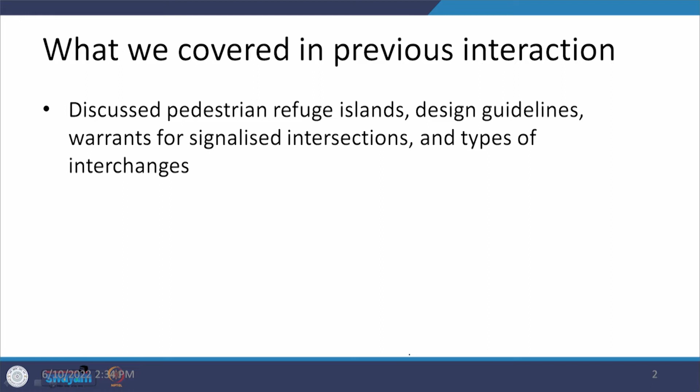Dear students, let us restart our discussion on intersection layouts. In the previous interaction, we have talked about the pedestrian refuge islands, and then we took the various design guidelines, which was followed by the warrants for signalized intersections, and then we had a look on the types of interchanges.

In today's interaction, we are going to move forward, and we will be first talking about the warrants for interchanges, and then what can be the feasible combinations under which we have to provide an interchange when we have different type of roads. And then related to the interchanges and specifically the ramps, we are going to talk about the various geometric features, and finally we will be discussing the ramp terminals.

So, let us start with the warrants which are required and under what conditions the interchanges should be provided. Now, these are related with the same conditions as we have discussed before. That means, they are related with the traffic volume, the type of mobility which needs to be ensured, or it may be an outcome of the topographic features. So, the very first point is that if the total traffic on all arms is in excess of 10,000 PCUs per hour, then this is one case where the interchanges are warranted.

Another condition is that if we have to maintain a total access control, that means there are limited locations from where the entry and exit can be provided to a system, then that is also a case where the interchanges need to be considered. Another case relates to what has been taught in terms of the types of interchanges, where we said service interchanges and system interchanges.

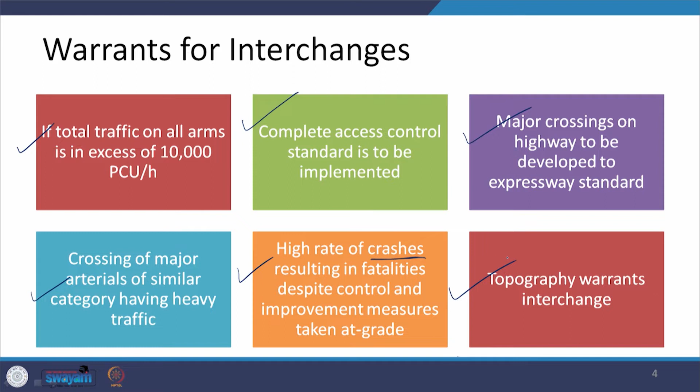Another case can be related to the crashes. If many improvements have been done at grade intersections so as to eliminate or reduce the number of crashes happening at that location, and that is not resulting fruitfully, then probably the next solution is an interchange. And as I said, the topography is another thing which may also warrant that we have to provide an interchange.

Now, if we try to talk about the feasible conditions, then here what you can see is that we are talking about urban roads. So, we have collector streets, subarterials, arterials and urban expressways, and this matrix tells that when you have a collector crossing with the expressway, then it is recommended on the basis of the site conditions, but in the rest of the cases usually it is not going to be there.

When we talk about the subarterial, if it is coming with an arterial, then it is on the basis of site conditions, but if it is coming with the expressway, then it is generally recommended. If you talk about the arterial and its crossings with the other types of road systems, then it is shifting by one towards the left: if it is a crossing with a subarterial, it is on the basis of site conditions, but in the other two cases we are going to usually recommend or provide an interchange at that particular crossing.

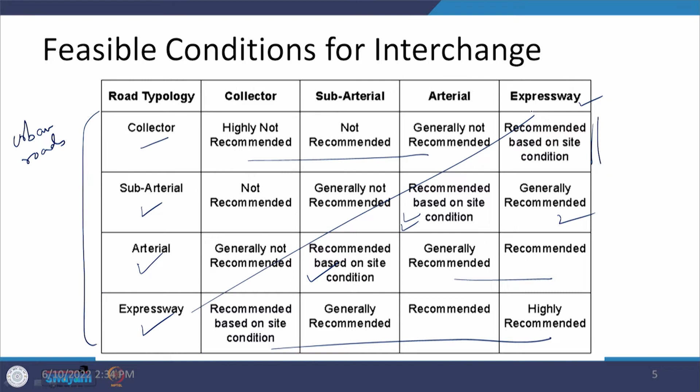Now, with expressways, if we have to look at the conditions with respect to the mobility on the expressways, then we are probably going to provide one. So, what you found is that if I put it in this form as a matrix, then all of the things are getting repeated, and that is how we can create it.

But if we look at the rural highways, where we have different categorizations like intercity expressways, national highways, state highways or the district roads, here also the same condition is observed. When you are talking about ODR or MDR with an expressway, then it is usually recommended based on the site conditions, and when we say site conditions, we are looking at the amount of traffic which needs to be separated out so as to ensure the mobility on the expressway.

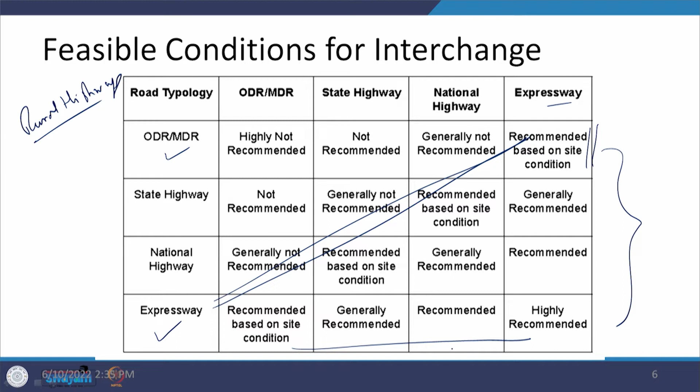And the same way, if we try to see, then we can again create a line here, and when we create this line, then this matrix is going to be repeated. In that sense, if we look at an expressway, we have to provide the connectivities with the rest of the things, then this is going to be provided, and of course, when an expressway crosses an expressway, then it becomes a highly recommended situation. But when we are trying to provide different types of interchanges which we have looked at, we have talked about 3 arm interchanges, 4 arm interchanges, or service or system interchanges.

Different categories were discussed, and if you look at those categories, then here in this slide we are talking about the amount of space which is required, and you can see that the minimum space is required in the case of diamond, where it is 28,000 square meters. But if you are going to a rotary which is having 2 levels or say 1 level system, then it is going to be enormous. It is 1,80,000 square meters area which is to be acquired beforehand. And in the case of full cloverleaf also, it is not a small amount, it is quite a big one, as 73,000 square meters are required.

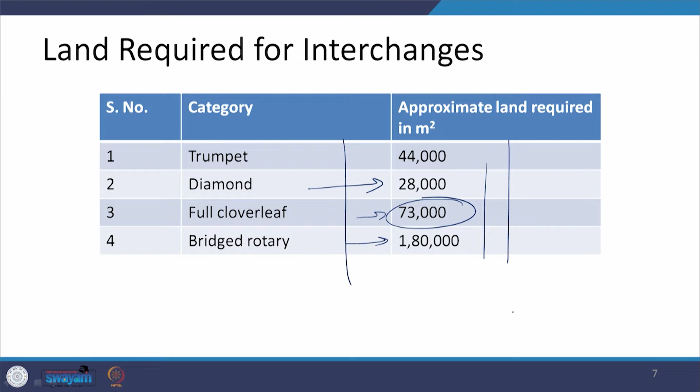Now, let us talk about the geometric features. When we talk about geometric features, the very first thing which needs to be looked at is the design speed. And this design speed is to be talked under different scenarios, like when we are talking about the highways, we have already discussed in the very starting of this course, it is considered as 80 kilometers per hour or 100 kilometers per hour, but on urban expressways, 80 kilometers per hour is the value.

If you are talking about the ramps on the multi-lane highways, then it should not be less than 40 kilometers per hour. And wherever the 2 connectivities are there on which the speed difference is going to be observed, say you are moving on a highway and now you are exiting the highway, so you have to reduce the speed and then get out of the system. So, in those cases the speed differential becomes an important thing, and this speed differential at any point of time should not be more than 10 kilometers per hour. So, it is a sequential manner. You are coming from 100 to 90, 80, 70 and so on. That is how it keeps going on.

Now, when you are talking about interchanges at different levels, we have discussed that there are loops, semi-direct connectivities, direct connectivities, diagonal connectivities, and therefore, an essential element is the ramp. Now, when we are providing these ramps, what needs to be taken care of is what we are going to talk now. The very first thing is that it should have 2 lanes as far as possible instead of a single lane system, because tomorrow you cannot reconstruct. If the traffic increases and the requirement is there, then it will become very difficult to have one more lane. So, from the very starting we talk about a 2 lane system.

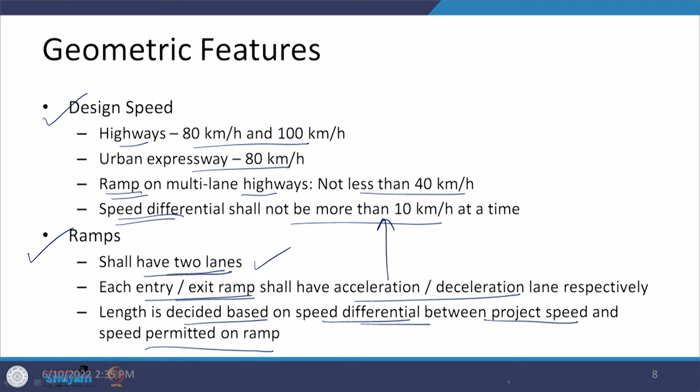Entry and exit ramps shall have acceleration and deceleration lanes respectively. This is an additional feature, because this helps in negotiating the speed differential with increments or decrements of 10 kilometers per hour. Length is decided based on the speed differential between the project speed and the speed permitted on the ramp. So, if we are talking about 40 kilometers per hour on a ramp and we are coming at 80 or 100 kilometers per hour, this difference has to be taken care of. And when you are accelerating and decelerating, on the basis of the acceptable or comfortable acceleration or deceleration rates, we can get those lengths. So, there are certain values which are already given, and few of these we have looked at previously also.

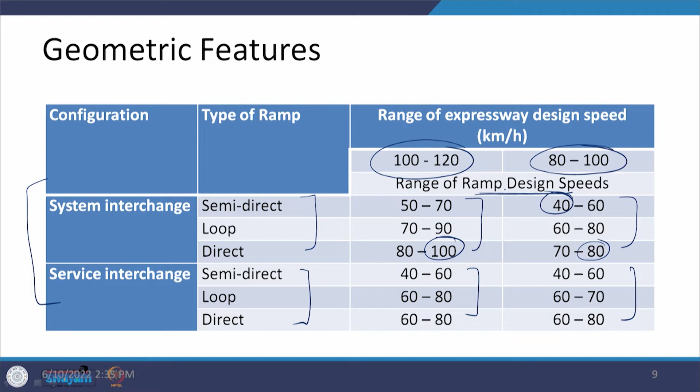The highest value we are looking at is the lowest of the speed range on the expressway. Similarly, on the other side, we have 80 as a value, which is again the lowest of the speed range of the expressway. These are the values which can be considered. These are the different types of speeds, and as discussed, it should not be less than 40 kilometers per hour. This is also being talked about here.

Now, in this slide, further information has been incorporated, not only about ramp design speed, but also two features: radius of curvature and safe stopping sight distance in meters. These are given for design values on major highways, which can be 80 or 100 kilometers per hour, and for those speeds, the minimum or desirable values of these three components are given, but we have already discussed these.

So let us see what the radius of curvature or SSD values being talked about here are. They talk about 60 or 45 meters as a minimum, but desirably 90 or 60 meters as a radius or SSD respectively, at a ramp speed of 50. For 50, SSD is 60. The same is done here for a ramp design speed of 65, where SSD comes out to be 90, and the radius of curvature is defined as 155. But for ramps, the values given here are 45 meters of SSD and 60 meters of radius of curvature.

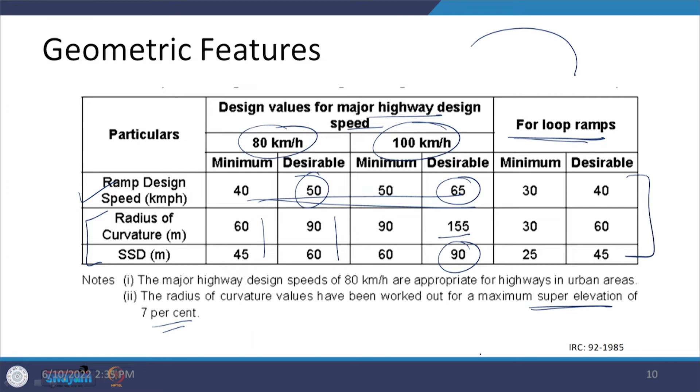So when designing this, when the loop is taking a curve in this form, another thing to look at is the super elevation, and the maximum value of super elevation, as discussed previously when we talked about alignment, is 7% here.

Now, when we look at this ramp structure going continuously with changes in elevation, the sight distance is one thing we are trying to look at. For that sight distance, the driver's eye height has been kept at 1.1 meters. For the object, the object height is kept at 0. So whatever line of sight is there is being observed and ensured.

When we ensure this, it results in some value, x meters. This x meters, when looking at the profile, needs to be adjusted such that the distance traveled corresponds to the distance traveled in 10 seconds. That is the minimum value which needs to be ensured.

So this is how we find out from where to what point we are going to measure, but at the same time, this point being talked about here, in plan, can be defined as the nose of the island. From that nose of the island, we again take a distance x meters, and if our vehicle is there at that x meters, this is how it is going to be ensured.

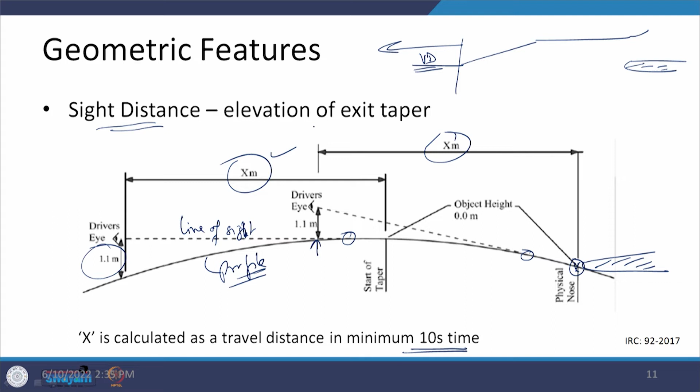These are the ways in which we are going to start, and another thing to consider is that because you have a design in this form, there can be a nose of the island. So looking at this, another thing is that the start of the taper is there, and from that start of the taper, the visibility distance should also be available, and that visibility distance is taught as x for a 10-second movement.

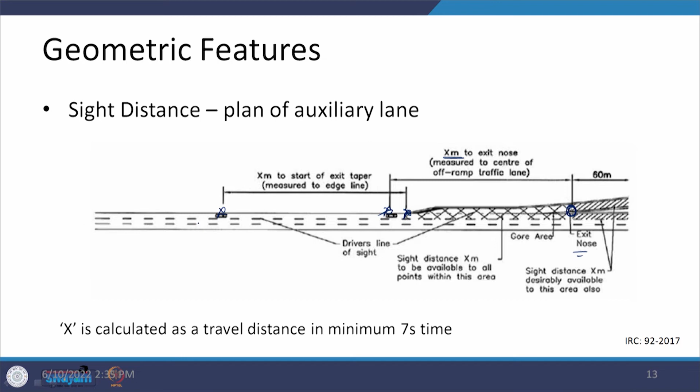But when we are looking at these auxiliary lanes, the time which we consider to calculate x is 7 seconds instead of 10 seconds.

Now here you can see this is an exit nose. This is the point and this one is the island, and here we have the chevron markings. These chevron markings culminate at this point and then extend as a straight line, as we discussed when we talked about pavement markings.

Now what we are doing is from the nose we again take x meters, so you come to x meters at this point. Then there is another location where we observe that tapering is going to happen, required on the basis of the deceleration lane length to be provided under this condition.

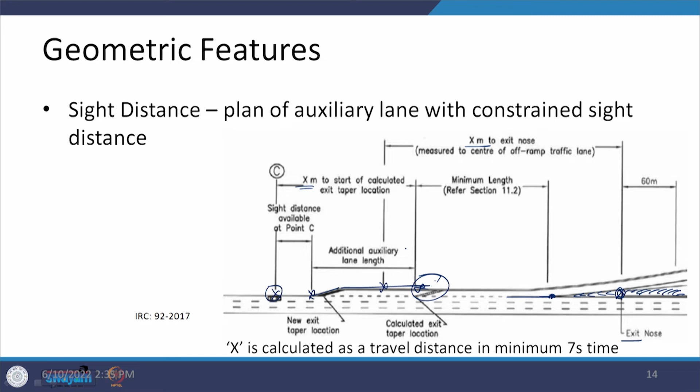Now if there are constrained side distances, how we can readjust is that from this particular point we go back again x meters. So we come to this point, and from there we look at the sight distance which is available. We come to this point and from there the taper has been provided. This additional auxiliary lane length may be required, and again the distance is calculated on the basis of 7 seconds time.

Now the next thing is that because this ramp is going from an elevated system to a ground level, there can be an at-grade intersection with another road, so the gradient also needs to be looked at.

There are different values being talked about here. Tangent grades when you are coming towards the ground side are preferably flat, limited to 4%, but not exceeding 6%. But when you are on ramps, they are desirably 6%, not more than 7%, and on high speed facilities, flyovers, or access controlled facilities, these are 2.5% to 3.5%.

Now when you are coming from the top and reaching the bottom, the system is going to be in this form - you have a summit curve and a valley curve. There is a valley curve at the lower end and a summit curve at the upper end, and that needs to be designed, so the length of this curve also needs to be taken care of.

Then another thing is the medians, if provided, or the shoulders, if provided - what should be their width. The medians should have a minimum width of 1.2 meters, and shoulders, if we are talking, should be provided as 2 meters wide, but out of this 2 meters, 1 meter can be a paved situation.

Then the number of lanes - we have already said that at minimum 2 lanes we should try to provide, but there may be a requirement of increasing the number of lanes, and that depends on the total amount of traffic volume moving on these ramps, and at the same time the capacity of one lane on a ramp. Based on that, the total number is identified.

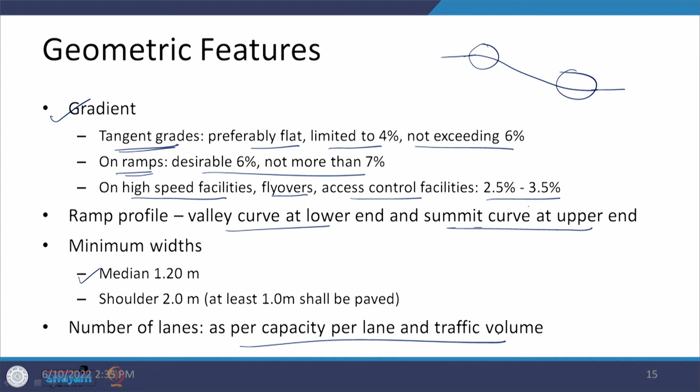Now we are looking at a condition where what superelevation value is there, what should be the radius, and they have been defined for different values of speed. The values here are as low as 2% superelevation, which in this case is as good as camber. But when you go above, this is 4 or 6%. 4% is the usual value adopted for urban areas, and then we try to go to even 6 or 7%. Desirably it is 6%, but maximum if required we can go to 7%.

We can also calculate these values directly by using the formula which we have discussed previously.

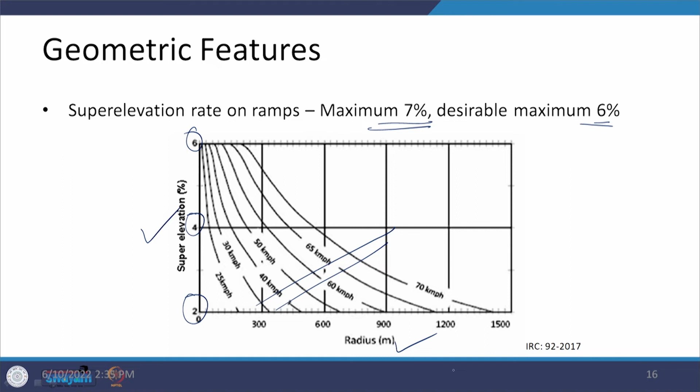If we are required to provide acceleration and deceleration lanes, because there is a changeover in speed from highway to ramp or ramp to highway, then these lanes may have a length of 250 meters as desirable and 180 meters as minimum for the acceleration lane, and 120 meters or 90 meters respectively for the deceleration lane. Another point is what can be the lateral clearances which need to be ensured.

If there is a road going at the top and then there is an underpass, the road is also going in this form. We need to see what should be this value as a lateral clearance as well as vertical clearance. When we talk about lateral clearance, whatever carriageway is being provided along with the shoulder on the sides is what we are going to talk about. So the roadway with a normal shoulder is what we should try to ensure.

In the case of overpass, meaning this particular road which is going here, what should be the lateral clearance with respect to the carriageway is what we are talking about. We may have a curved section, and if that curved section is there, it can be 225 mm wide, with open parapet walls provided on the side so that no vehicle gets out of the system and falls down.

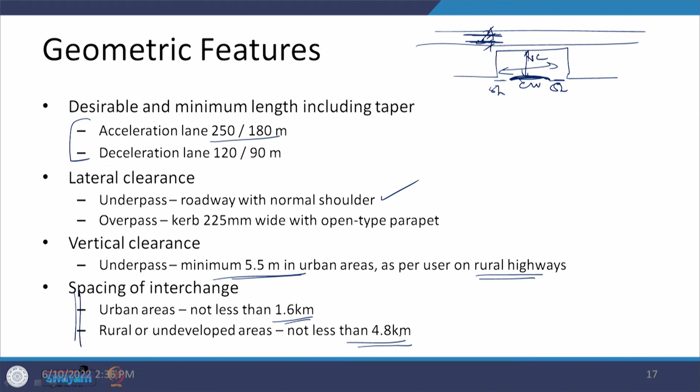One other feature is that as we talk about interchanges, we again and again say that there is limited access to it, in the sense of entries and exits—entry to the system and exit from the system.

When we are looking at this, the various things usually considered are the functional classification of the road. Obviously, when we say arterials or expressways, this access control is going to be quite high. Or what are the characteristics of the traffic, how much traffic is there, what is the composition, and what are the cutting traffics which are there on the crossing roads. We have to take care of that.

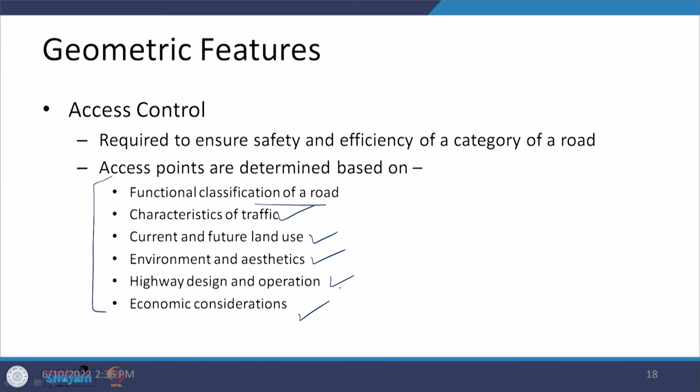Along with that, we have to see how much traffic gets in and gets out of the system, so what are their proportions. Then current and future land uses are also going to make a difference in terms of the traffic which is going to be either attracted or generated at that location—environmental factors or aesthetics of the design, highway design and operation, and economic considerations. So there are so many attributes or variables which need to be taken care of when discussing these.

Now, what are the typical challenges which need to be taken care of when providing these interchanges? The very first thing is that sight distance needs to be ensured. Wherever the exit is there, as we have already looked at, sight distance has to be taken care of from the nose of the island. And when we talk about the nose of the island, there is going to be a chevron in this form and then a straight line which can be 30 to 60 meters long.

When we are looking at this, we are talking about the gore nose to the paved gore. So this is the gore nose area, but when you are looking at a condition where here the system is going to be in this form.

So, this is another area which is a paved gore, because the funnel is getting created here. So, this total distance should be unobstructed, and this again we have discussed in terms of x values and others. Then exit speed change, because when you are coming out of a system in this form and then going, there is an exit speed change from say 100 kilometers per hour to 50 kilometers per hour. So, what is this? We have to use the deceleration lane here, so we have to take care of that.

The merges: by merges we mean the movement here, and this is the system. The vehicle is coming from here, it goes along, then takes this deviation and comes into the main traffic. So, when we are providing these acceleration lanes, rear end crashes can be reduced a lot. Then right side entrances and exits should be avoided, because they are opposite to what the driver is otherwise assuming.

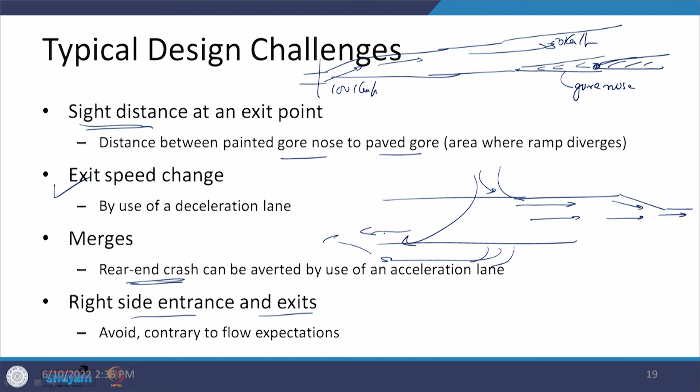Then fixed object hazards. Fixed object hazards may come because there are requirements of illumination, of providing road signs, or if there is metering on the ramps, then the signals are going to be there, or there are rails provided on the sides of the carriageway at its extremities. So, whatever such things are there, they should not create any obstruction; we have to take care of that.

Wrong way entrances. Wrong way entrances happen because there is a flaw in the design. When that flaw is there, the vehicle which is not expected to come from a particular direction is now coming and creating a confusing state for the other drivers or vehicles. So, that needs to be taken care of. This also happens when you are coming into a system in this form and at the same time going out of it. If the highway is provided, traffic goes here and traffic comes here. So, what is the area provided between these types of connectivities, which happens more in the case of cloverleaf arrangements.

So, what is the spacing between the entrances and exits? These spacings need to be looked at with respect to the weaving portion, and what should be the length of the weaving portion. We will be talking about this also. Or the staggering of the ramp terminals and controlling the access to the ramp is another way that we can control things to make it safer.

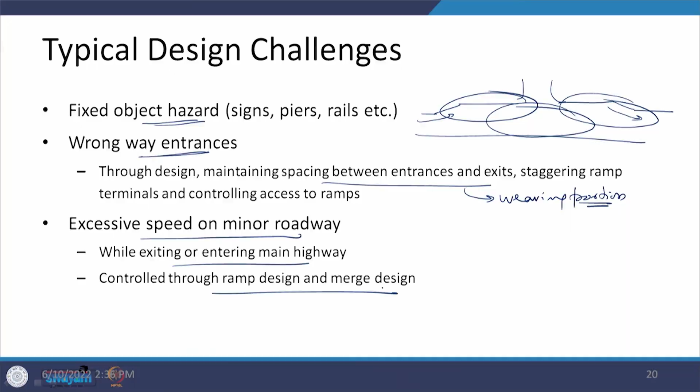Excessive speed on the minor roadway. That may happen, and if they are exiting or entering the main highway with high speed, they may not be able to be controlled in this area, and this may be fatal to the vehicle, or to other road users too. So, this needs a good ramp design or merge design, and that is where the length of acceleration lane, deceleration lane, and the sight distances to be ensured with respect to the nose of the islands, which we have discussed, have to be taken care of.

Now, let us talk about the ramp terminals. What are ramp terminals? These are the portions adjacent to the through travelled way, which include a speed change lane, tapers and islands. So, vehicles are coming out of the system, maybe negotiating in this form, or negotiating directly outwards, say in terms of a diagonal ramp. That particular element is what we are now looking at. As far as possible, they should be designed as a free flow type, and there is not going to be a reverse flow on these, because all of the traffic is moving in the same direction.

Now, these can be of two types, one is an entrance terminal, another one is an exit terminal. Now, when we talk about the entrance terminal, it means the traffic is coming from a minor road and it is coming on a major highway, and therefore, this ramp traffic is getting merged on a high speed road. But exit terminal means a condition where the vehicle is going out from a highway on which it was moving at a higher speed, and now coming on the ramp where the speeds are going to be lower. So, these are the two things.

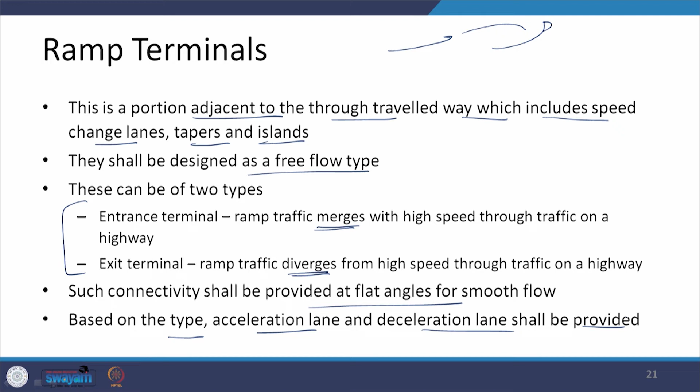So, in one case there is going to be a merging action, in another case there is going to be a diverging action, and we have looked at the design of the acceleration lane and deceleration lane, which are basically related with these situations. Now, where the merging and diverging are happening, they should be at flat angles as far as possible, and this will ensure the smooth flow. Then based on the type, acceleration lanes and deceleration lanes need to be provided.

The speed change lanes shall be visible to the approaching traffic moving on the horizontal curve or the vertical curve. When we exclusively talk about the entrance terminal, they shall have sufficient length so that the vehicles can take a turn on the ramp at the design speed for the ramp we have seen in the tables, and then they can increase the speed to the operating speed on the highway, because they are coming with a speed of say 50 kilometers per hour, but on a highway the speed is either 80 or 100 kilometers per hour. So, it is progressively increasing.

There shall be sufficient maneuverable space, so that the entering driver has a view of the traffic in the adjacent lane and can move laterally to the main lane of the highway as soon as the opening appears. So, it should have sufficient distance in this form. The traffic is moving here, and there is traffic which has come in this form and then gets into the situation like this. So, sufficient space needs to be ensured. No curve shall be provided within the length of the acceleration lane.

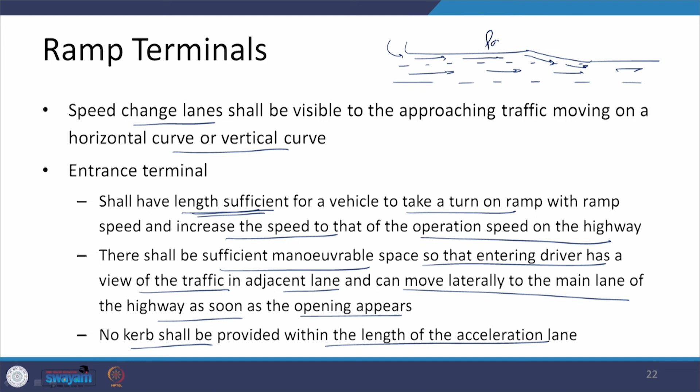Then these can be of two types, the direct and the parallel type. The one we have discussed here is a parallel type, and the other can be that you are coming from here and getting into the system in this form. The traffic is going this way, and the traffic comes and tries to merge in this. So, this is a direct case. This direct taper provides a direct entry at flat angles, and it is usually preferred by drivers, though in the parallel situation they have more space and better visibility of the traffic moving in the adjacent lane, and it requires more space if there is a turning curve at that location.

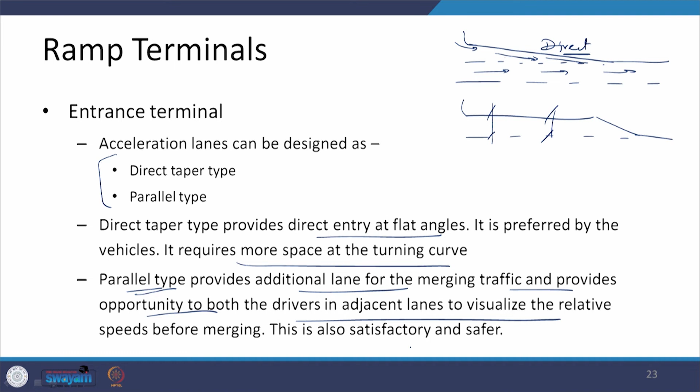When we talk about the parallel type, it creates an additional lane, as we have already looked at. So, this is going to be an additional lane in this case, and it provides an opportunity to both the drivers in the adjacent lanes to see each other, judge each other's speeds and accordingly do those maneuvers, and it is satisfactory and safer in that.

When we look at the exit terminal, the length of the exit terminal again has to be long enough to allow the vehicles to reduce the speed from highway speed to ramp speed, and if they are taking a curve, they should be able to negotiate those turning curves too. The radii are already discussed with respect to the design speeds on ramps, and here also we can have both types of designs: the direct taper and the parallel taper. The nose separating the through lane from the turning lane shall be offset from the edge of the through lane by 2 meters. So, this is a nose which is provided, there is a through lane here, and there is the other lane in which the traffic is going in this direction.

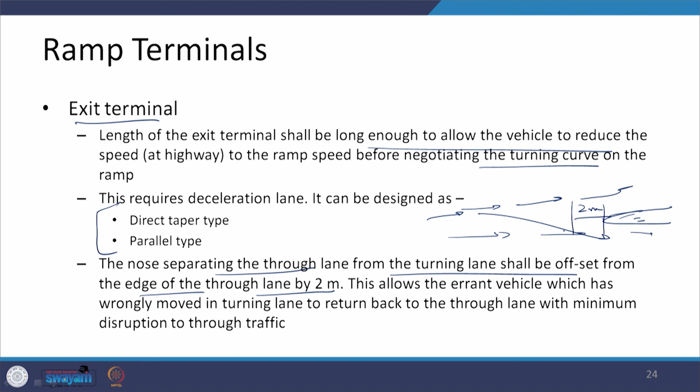Now, this is going to be offset by 2 meters backwards. The reason being, if by any chance any vehicle has gone into this deceleration lane and wants to come back, then that should get an opportunity to do that. The core area which is formed by the edges of the through lane and the turning lane immediately after the point of divergence shall be kept clear of all obstructions, so that they allow recovery to the vehicle which is getting out of control.

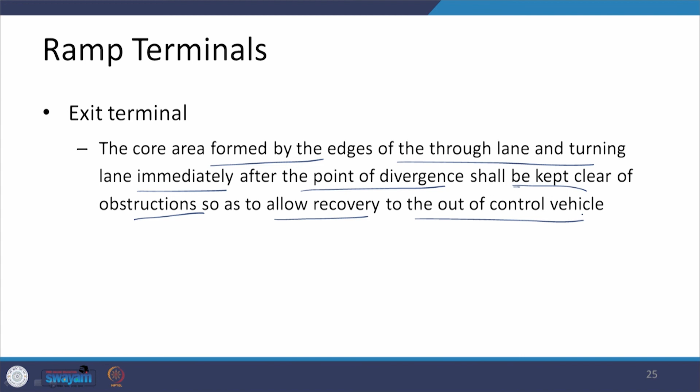So, this point we have already taken care of when we discussed the deceleration lane and the sight distances being ensured in that. So, here what you can see is that this is a case where the traffic is coming from this direction and it is accelerating here. So, this is parallel type for accelerating condition. The through traffic is coming from this side. So, this is a parallel type of system where this distance remains constant up to a certain length and then it becomes taper.

So, there are different widths which are going to be there. The location marked at A is creating a funnel condition wherein the width has been reduced from W2 to W1, and this W1 is the width of a lane at this point, which is 3.5 meters wide. Then in the taper design, one difference is in terms of these elements. The nose which is getting into the area is increasing in length. So, your point B is increasing in that direction.

So, here you are trying to exit, but basically at this point it is happening. So, that is where our W1 is going to be at this location, and the taper which is used is 1 in 25 to 1 in 30, whereas this is a deceleration situation, the traffic is coming from here, is deviating to this direction and then finally going out of the system. Because this is a parallel type, this is 3.5 meters. So, this W1 changes to W2, it is now increasing and allowing the traffic to get out of the system.

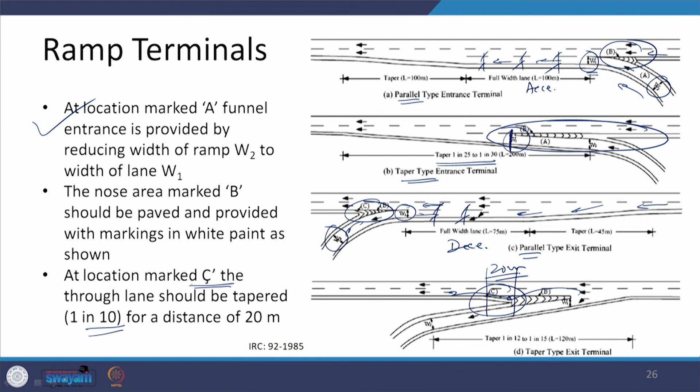And an additional thing is that in this case whatever traffic is coming in this direction may hit the nose. So, the nose has to be protected, one thing. Second, in this tapered system, what you can see in this sketch, it is being tapered downwards, and the reason is that if any vehicle hits here, then it will go back into the lane. So, it is not going out of control, it allows the vehicle to recover. So, this is location C, and that should be tapered at 1 in 10 for a length of 20 meters.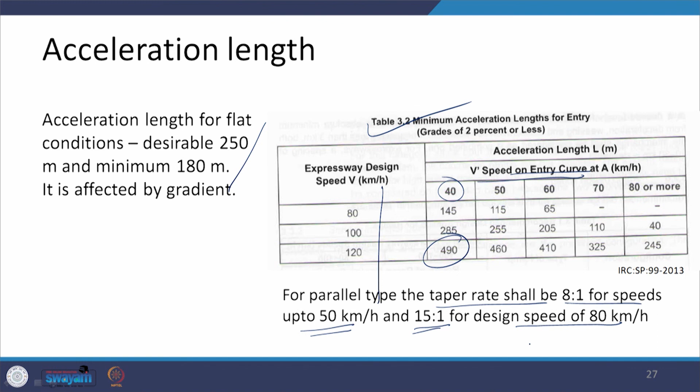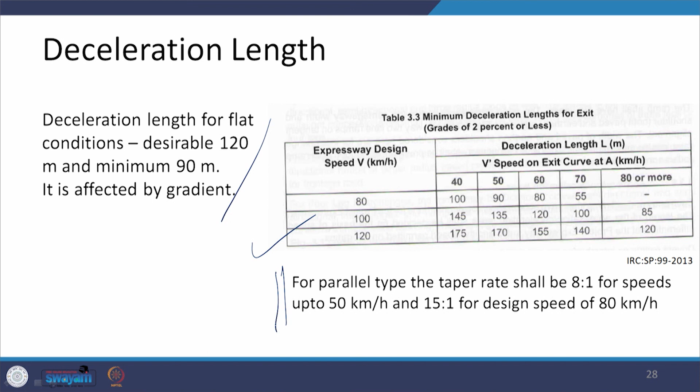And parallel type taper rate shall be 8:1 for speeds of 50 kilometers per hour and 15:1 for speeds of 80 kilometers per hour. Similarly, for deceleration length we talked about desirable and minimum, and the values have been given here, but these values are much lower than those for acceleration length. And here also the taper values remain the same, 8:1 or 15:1 depending on the speed.